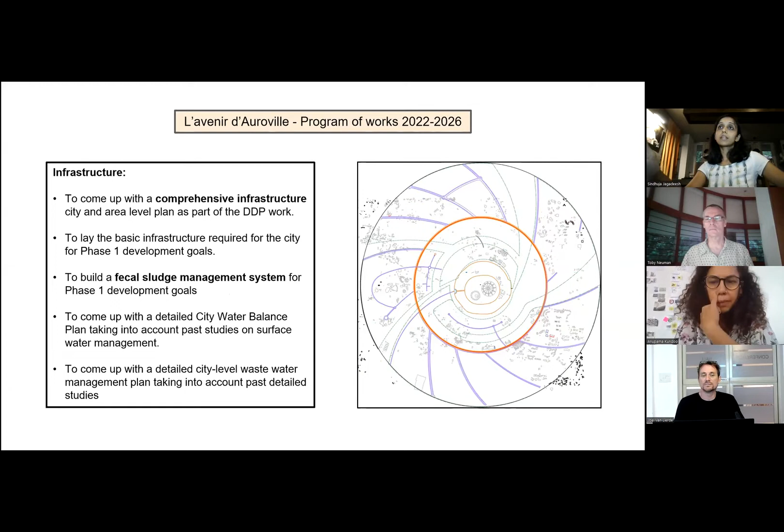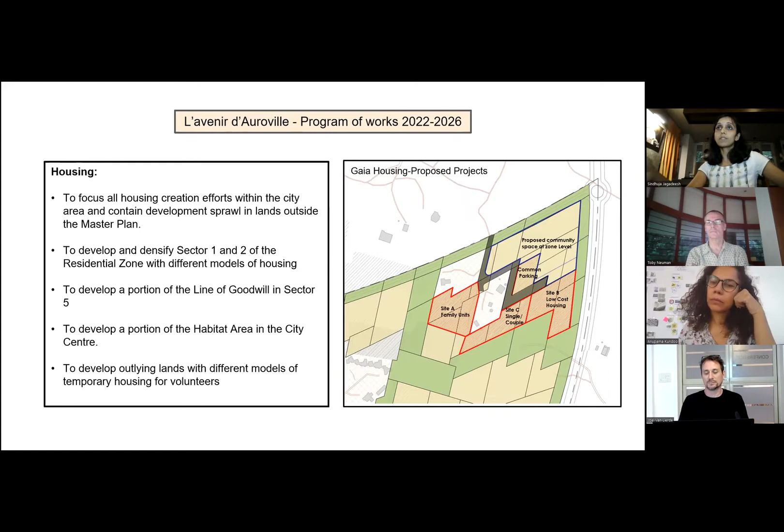Along with this, there is a whole infrastructure plan which is being drawn up right now. I think when I pass the mic to Govind, he can speak a bit more specifically on what are the infrastructure plans. And for housing, we would like to provide, at least in plan, in the next 3 to 5 years, housing for the 12,000 new people that are coming. Immediately for this year, we are starting to look at developing 1,000-bed permanent housing within Auroville, and another 1,000-bed sort of temporary housing for people who would like to come into Auroville and would like to explore and volunteer and stay maybe for some time, a few years or a few months.

Another very urgent thing to look into for us is the conservation of what is left of the green belt, because we know we have lost a lot of the green belt, not only to settlements, but also to wrong permissions given by the previous ATDCs for things like residential communities, hospitality projects, and so on in the green belt. And if you look at this map that is projected here, that's all the farms we have in the green belt, and some of them actually spill over into the city - all the purple lines that you see.

The green belt is supposed to be much bigger than what we have. We're looking at consolidating a lot of land within the green belt, at least what is available and reachable to us today, to work with FAMC and create a plan where larger areas can be consolidated for large-scale farming that can produce food for Auroville.

There's also a new FAMC in place by office order, put in place in June, and we're working together with them on this. We've been talking about this for years in Auroville.

At least I've heard this being talked about, that we have non-interconnected communities or settlements, gated community models with fences everywhere. Even though we have acquired the vast majority of land within Auroville city, we still have intra-community fences that have no connect, that doesn't allow connection between communities.

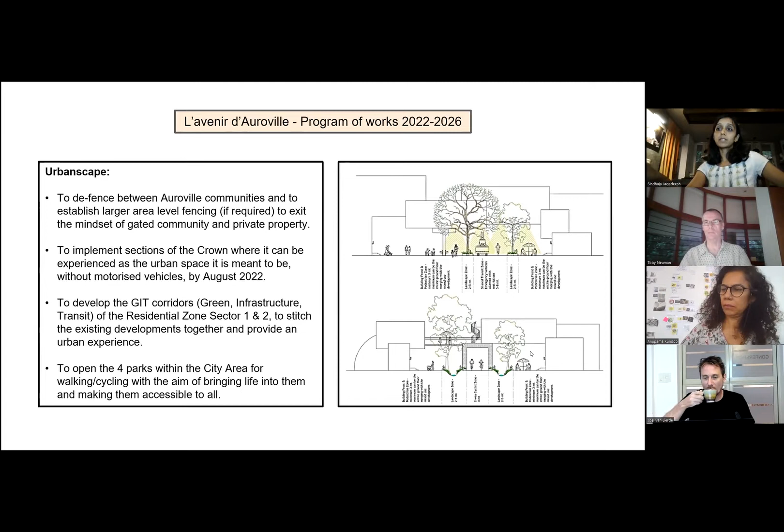We would also like to put our focus and energy into developing a detailed development plan for the industrial zone, at least to detail out pockets of it so permissions can be granted immediately. There are pending applications since 4 or 5 years which haven't even been replied to. So this work is very, very urgent, and we have taken it up.

I would like to take the opportunity to say that we are strengthening the team by hiring planners, urban designers, architects, interns. We have put together a whole budget and program for how to make all this happen, because we can't just talk about it anymore. We have to do it.

As we all know, the Crown project has started and it's happening on the ground, being executed by CPWD. We just issued a circular today to the community, informing them that the work has started, and we would appreciate cooperation. We plan to execute the whole 16.7 meter stretch in 5 different areas, or at least 3 different areas, to showcase what the Crown urban space could look like.

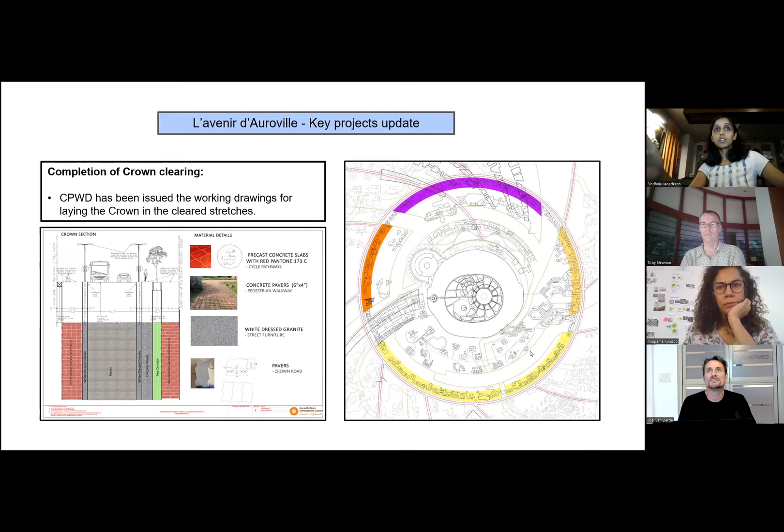More importantly, we would like to move by the end of this year to making the Crown a motorized vehicle free corridor, and I think that is what will bring the essence of the Crown. So the work has just started. Let us see how fast we can continue.

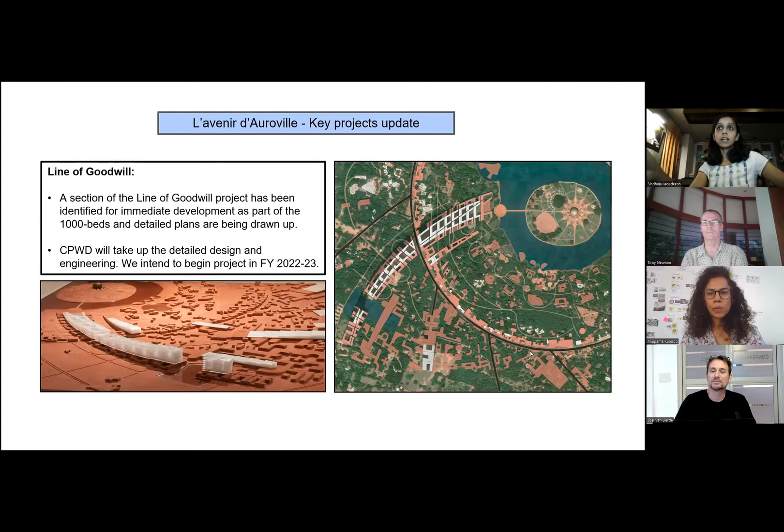Then there is the Line of Goodwill project, which has been in the pipeline for many years already and has been developed by a project team. Now it's a project cell directly under the ATDC. Anupama Kundoo herself has been working on this for several years, and Jaya is part of the project team, so I will let them elaborate when I pass it on.

When I talked about the economy, the development of the service node is not just for mobility transfer, it's also for economic development. This has all been detailed out over the last years. Only execution plans had not been done.

So now we have taken up this work of making execution plans, taking into account lands we own, lands in conflict and whatnot, and existing buildings, and actually creating a zoning that doesn't allow for sprawl development, because this is one of the problems in Auroville today. There is no FSI, there is no ground coverage defined, so everything has become a bit of a sprawl.

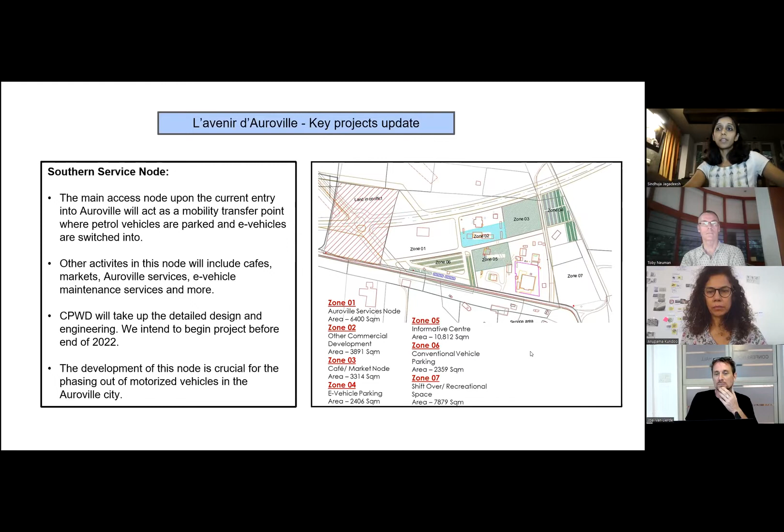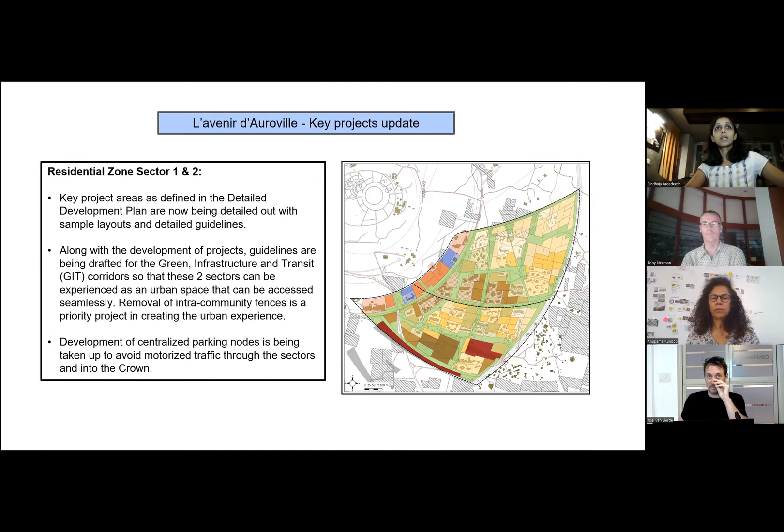So this is the area that we will be focusing on now, to open up public or publicly funded projects for housing for Auroville residents, along with Line of Goodwill. And these are some of the applications, public projects at least, which are in the pipeline we are looking at right now. They're in different stages of development.

And it is just to show you that this is the work that's being done, but there is a lot more. As we go through the files, the drives and the emails, we see that there is a lot to kind of dig up and revive and bring life to, because a lot of stalling has happened for projects and private initiatives. So unblocking, I think, is the motto of the new team, and I think we are very excited to do that. Thank you.

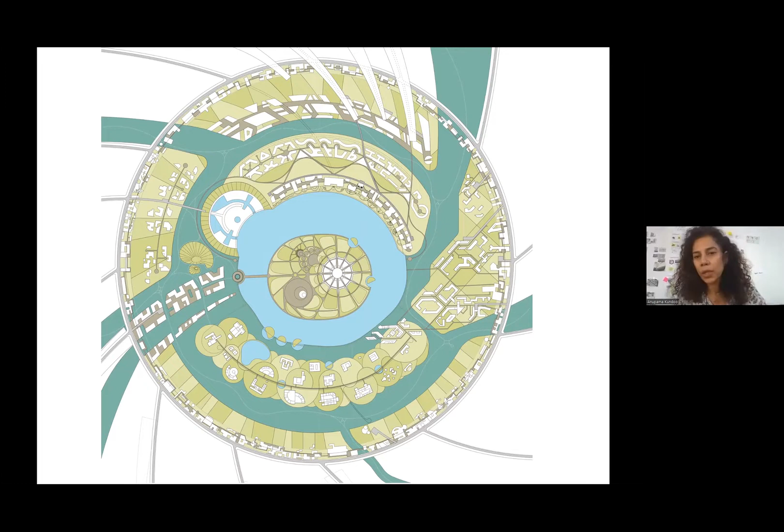Around 300 meters or so into the lake, up to the lake edge, is what we have to move through. So we will not have to rely only on bicycle paths beside the public transport—there will be many other networks, and I'll give you a glimpse of that. We're trying to consolidate this city center as a priority with all its developments, and as you know, the Crown Belt also connects the 4 zones of Auroville.

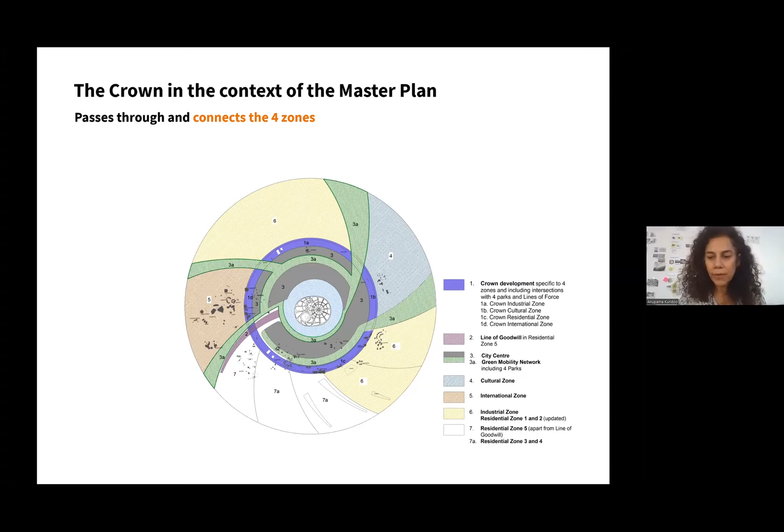So what the city center actually does is enclose, in a spiraling manner, parts of all of those zones. Each of the 4 zones are inside the city center. So we have the possibility to build swatches of all those zones and have a very cohesive city center if we develop all elements of it.

In the very first phase, if we only develop this much, we will achieve a population of 20,000, and that's what we're targeting as a first phase. Residential zones 1 and 2 will give us a further population of 5,000 people. The city center has not so much residential, but it does have 5,000 too. So together that is 10,000, and the Line of Goodwill, which you see jutting out from the left-hand side, will also give us 10,000 people.

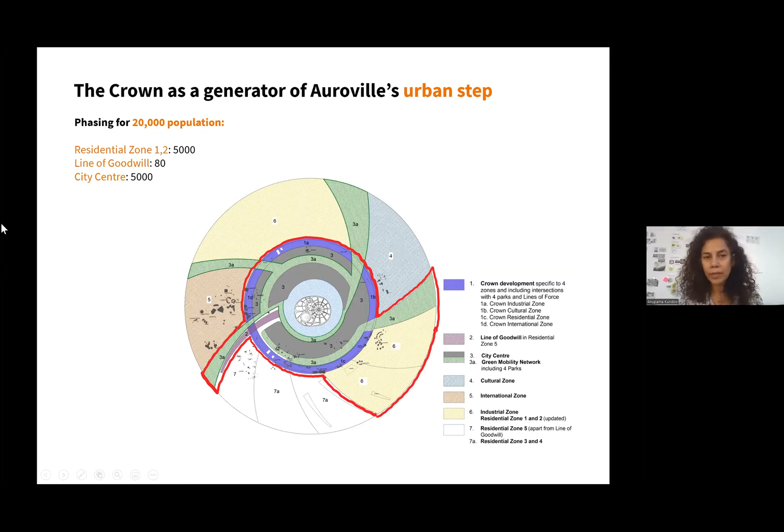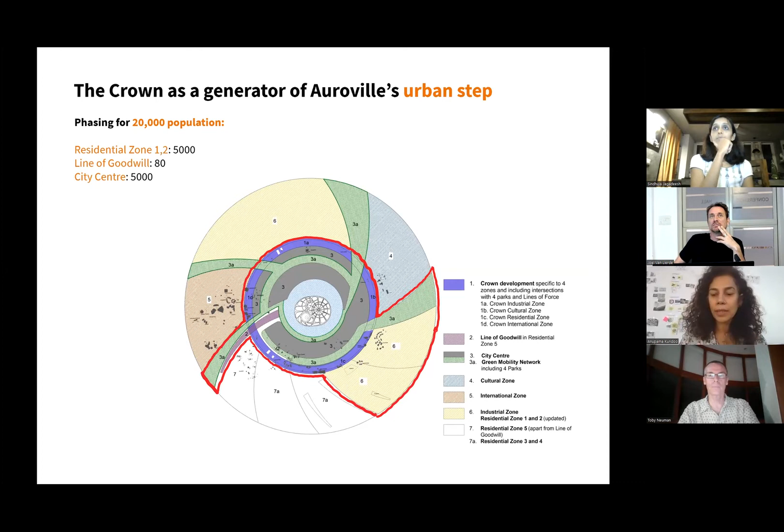There's a mistake on the slide which says 80 - it's altogether 20,000 people. But the new infrastructure we will lay is only the part of the Line of Goodwill, so only 700 meters long of infrastructure in a line will suddenly allow us a population of 20,000 without scattering.

One of the areas we have worked out is how the spirit of the crown, which is envisioned as a very pedestrian, lively space, not interrupted by vehicular traffic, can be realized. This has been one of the major areas of work in the last half a year, I would say.

The crown will allow us to go inward and outward - the facilities along the crown buildings will allow us to serve both sides of the crown equally. It has a very important role to enable the rest of the public transport, which will be in the radials and going outwards.

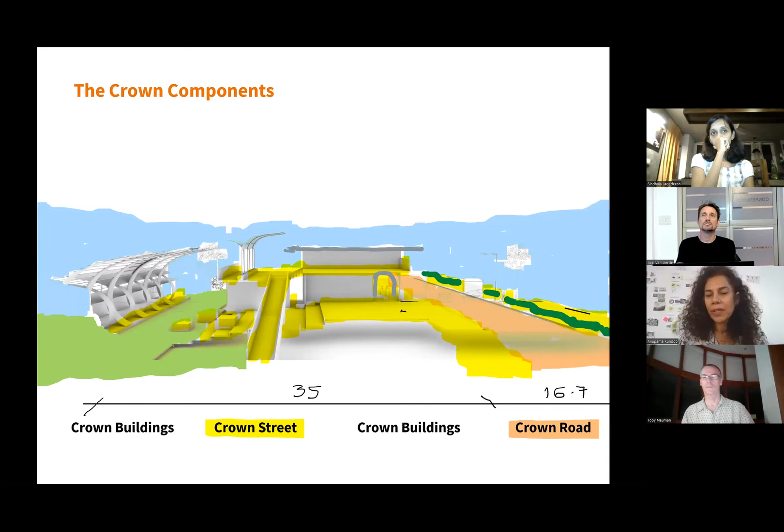So I'm going to skip this part. We have been defining the quality of urban spaces - the spaces between the buildings that actually make a city livable and prioritize public life. These are the type of parameters we have been defining.

Without going technical, I just want to give you an idea that in the crown, the public transport - we are making 4 separate networks. There's a red network. Auroville will have a plan of 4 totally independent movement areas, which we are calling the red network, the yellow network, the green network, and the blue network.

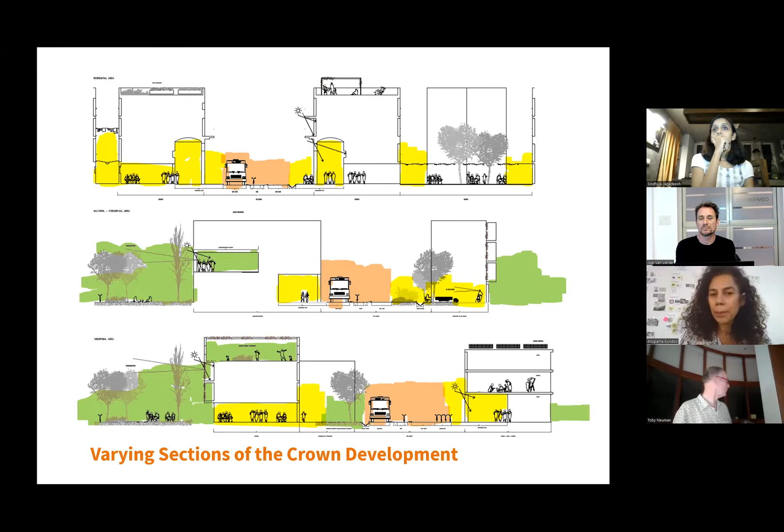These types of spaces will interact in some of the junctions in the crown. The section of the crown will vary, not only according to which zone it cuts, but also because it is conceived as a non-monotonous and fluid type of space, which has the intimacy of some of the old settlements we know in India already as pedestrian cities.

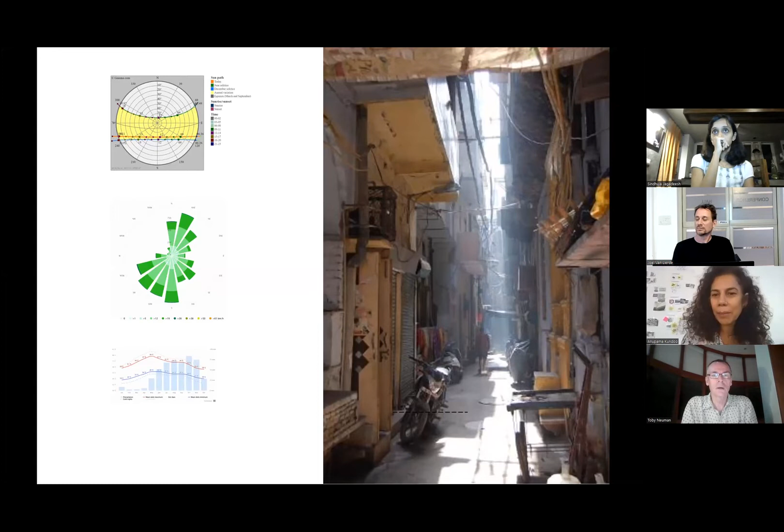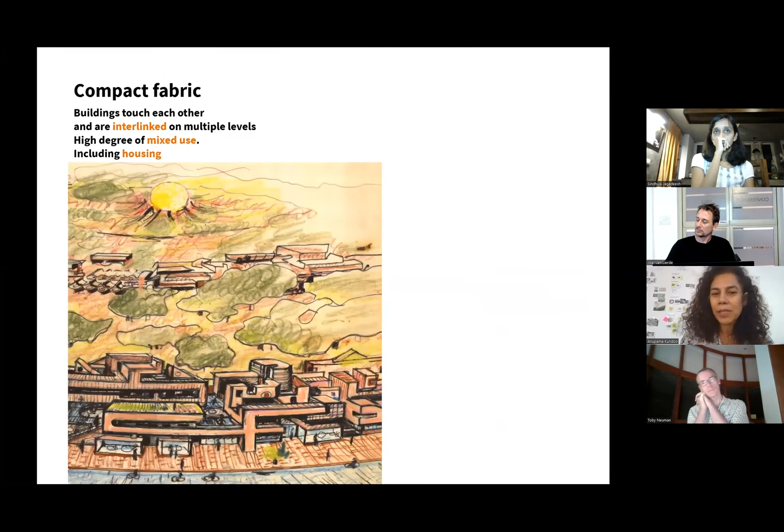But also we know it from a lot of pre-industrial examples across the world, where these became naturally shaded spaces that are comfortable for people to meet each other and not get interrupted by transportation cutting through. Auroville was always conceived like that, but we are working out the actual urban fabric, and we have studied all these other cities as examples, and of course Roger Anger's own work.

So please do not think that the Crown Road has to accommodate all of those wishes. Alongside the road, there are other paved areas which have this rich quality of public interaction, which are very much part of the Crown development.

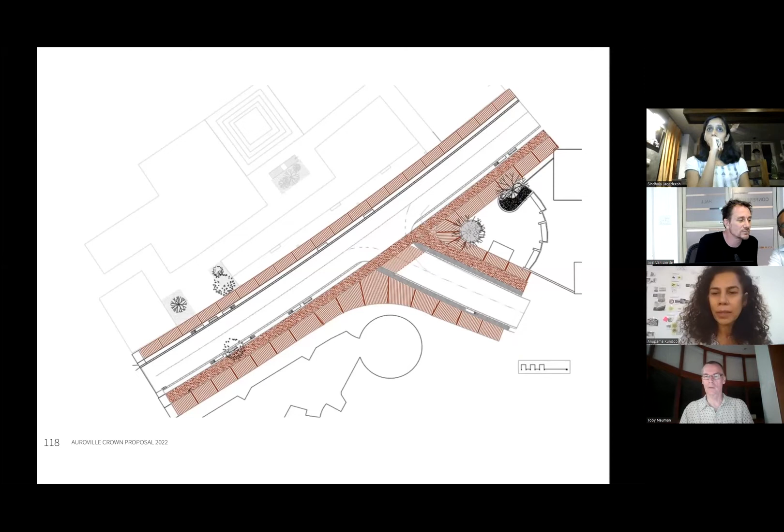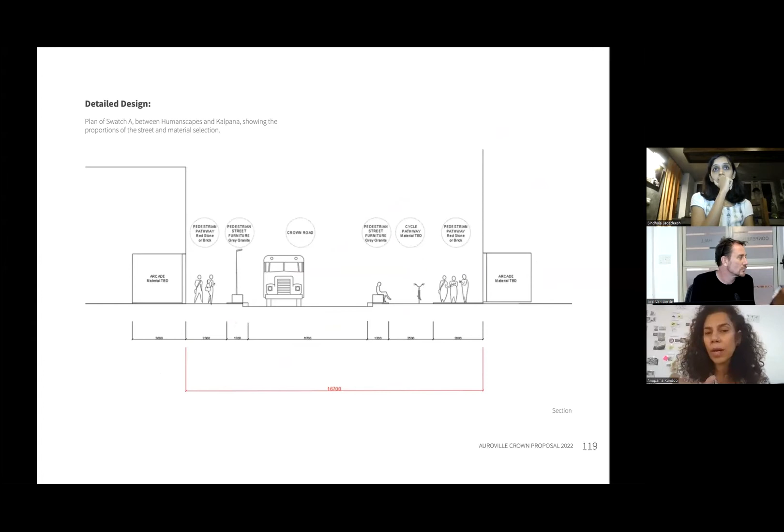One stretch has been detailed out, which we are going to test one-to-one - Sindhuja spoke about it. We have also got sections which show why, even though our other streets are going to be much more intimate, the Crown Road also needs to accommodate emergency vehicles, fire brigades, ambulances and so on, material delivery. So we have to also see it as an infrastructure corridor.

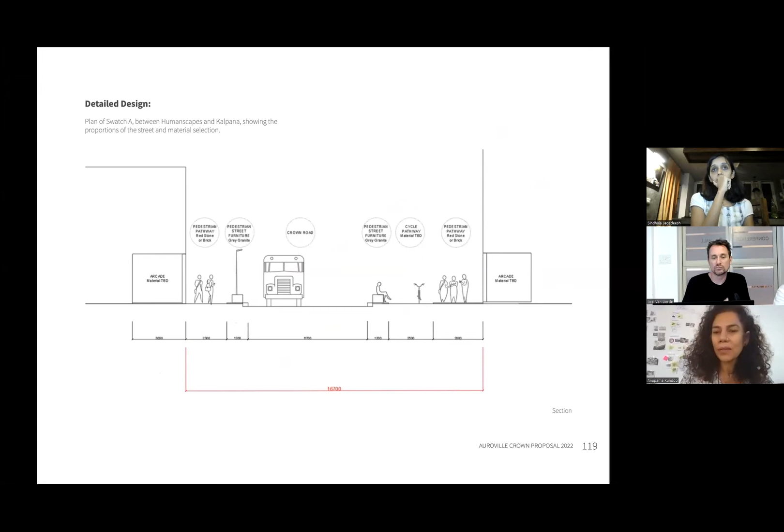So coming back to the city center, I want to explain the networks we are going to have. We have this red network where public transport will occur, and you can see that there is a semicircular thing at the bottom part.

That is the kindergarten and schools, and there's going to be a kind of a toy train, which was always kind of planned, so that the children are dropped off there and thereafter they go on their own.

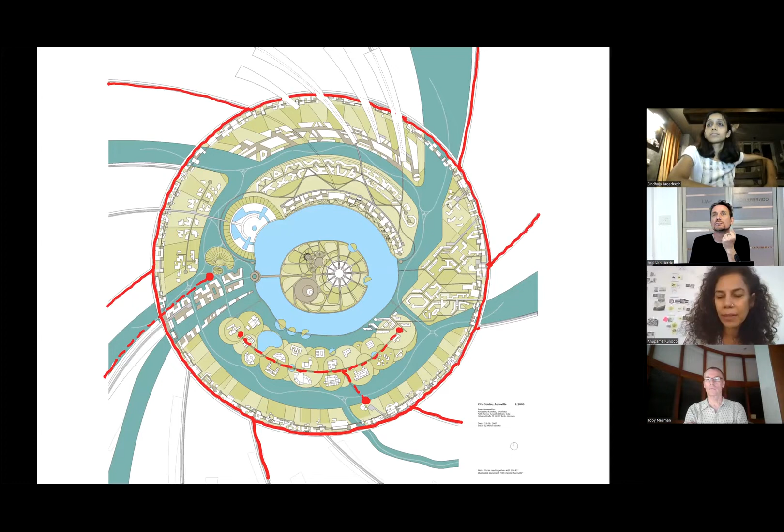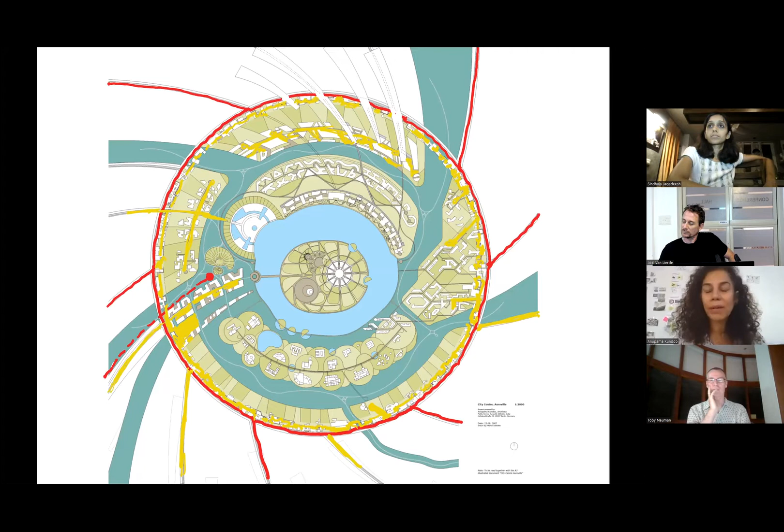There are very interesting shuttles planned here, some at the child scale and elsewhere at the pedestrian scale. The red network shows occasional service roads with timings. The yellow network is the hub of public spaces where all the facilities are, pedestrian spaces that are a little noisy, going through lively areas with the street quality many people in Auroville have been hoping for in the Crown, fearing it wouldn't happen. It indeed happens in the inner circle of the Crown.

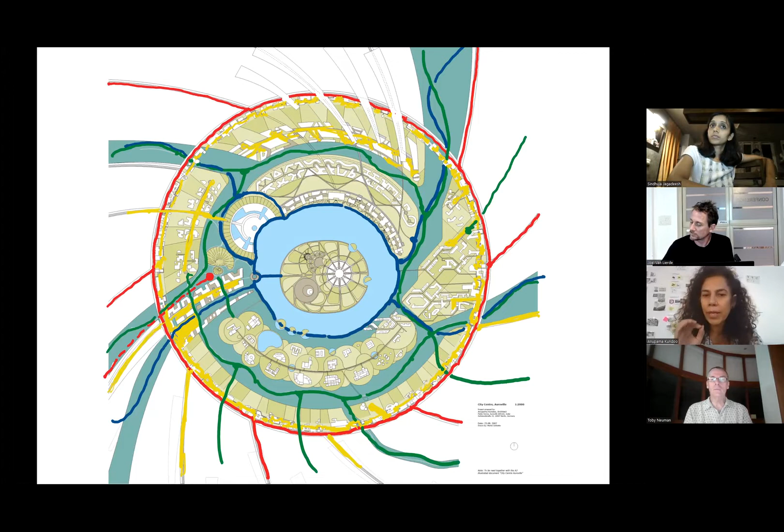Then there is a green network, for people who take bicycles, skateboards, or whatever and don't even need to see any vehicle. Every building can be accessed through this route as well. And the blue network is a very meditative, recreational route which ends in the lake promenade.

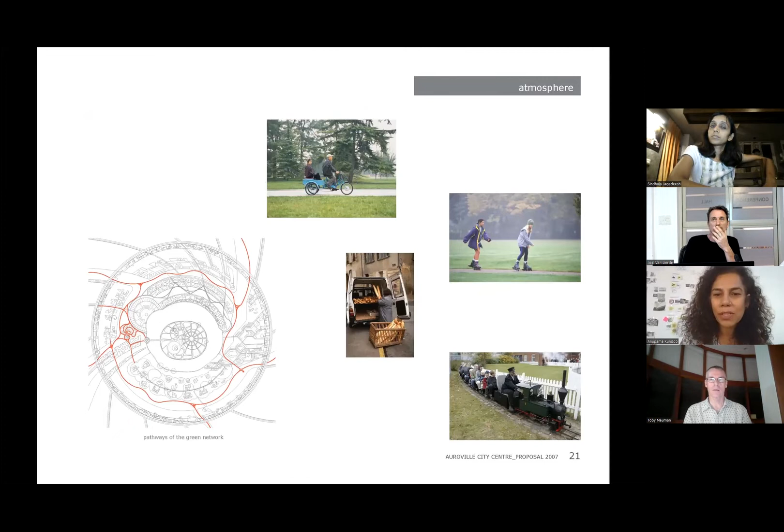This type of plan has been thoroughly worked out, and the quality of the various street sections has been defined since long ago. All of you who have used this building will understand that some of these principles have been tested through these covered walkways, so that even in monsoon, harsh rains, or sun, we can still feel like walking.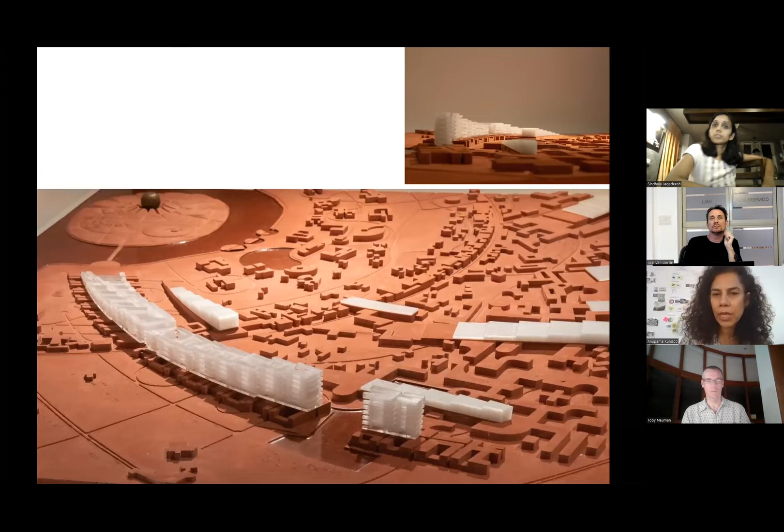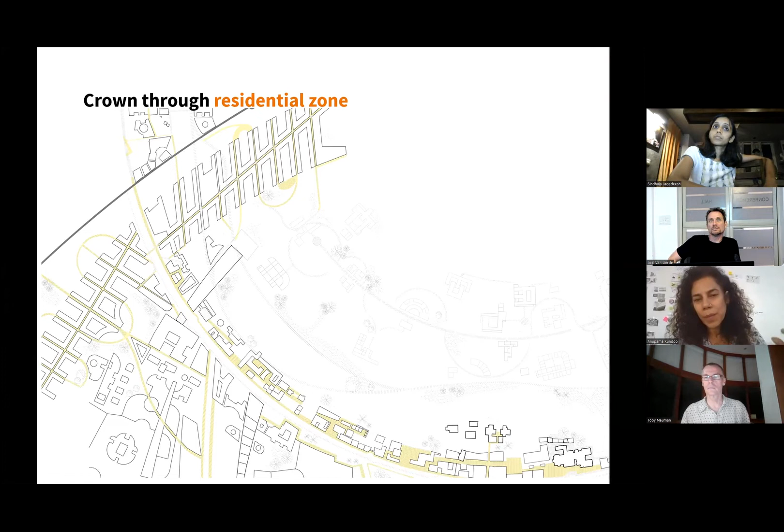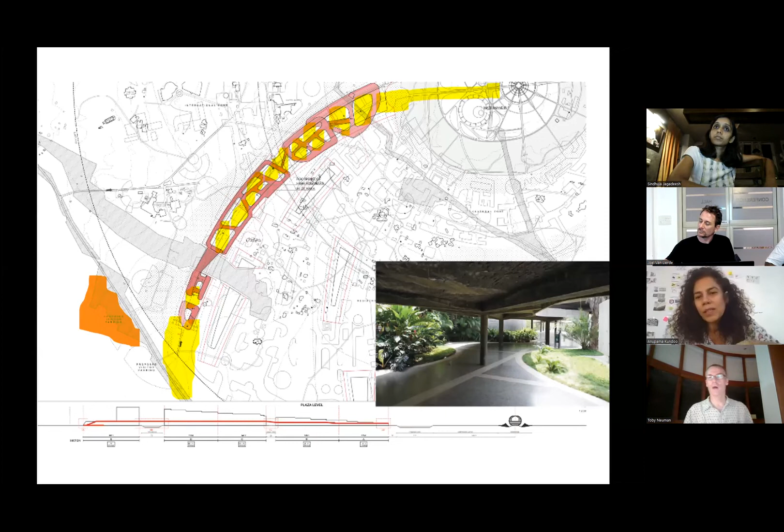I won't talk about the Line of Goodwill, which is an important project Jaya will describe, but I want to explain that the same red, yellow, green and blue networks will also go through such a tower building. These pedestrian spaces are fully integrated, bicycle paths are integrated, and visitors entering will walk through shaded spaces straight into the Matri Mandir, without disturbing daily life, with bicycle paths that cut through.

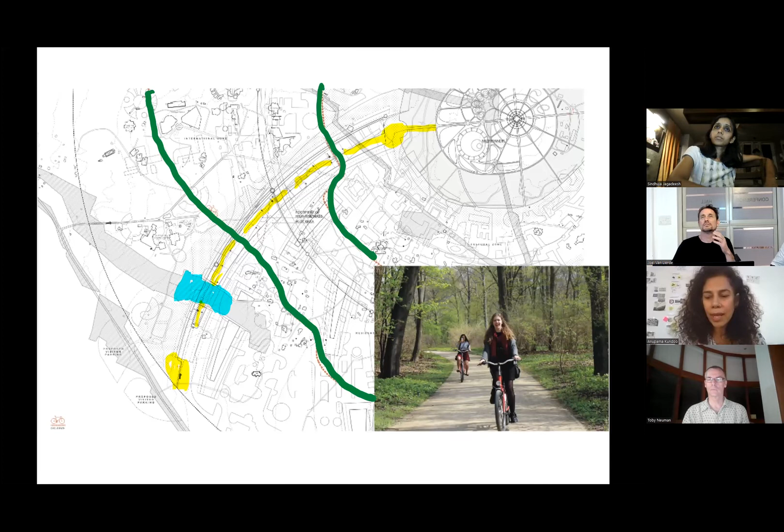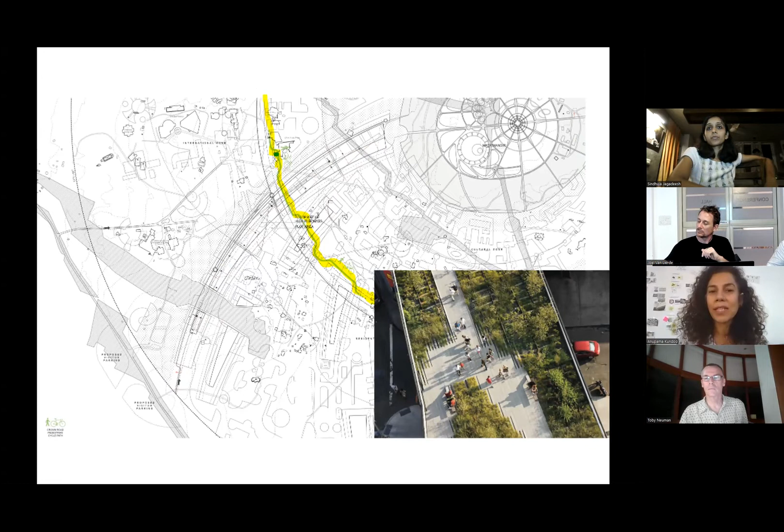The mobility is very holistic, and it's something I'd like to take a special session on to understand, so people are reassured that this Crown Road is not the only way to move in Auroville. There are intricate networks in each and every zone.

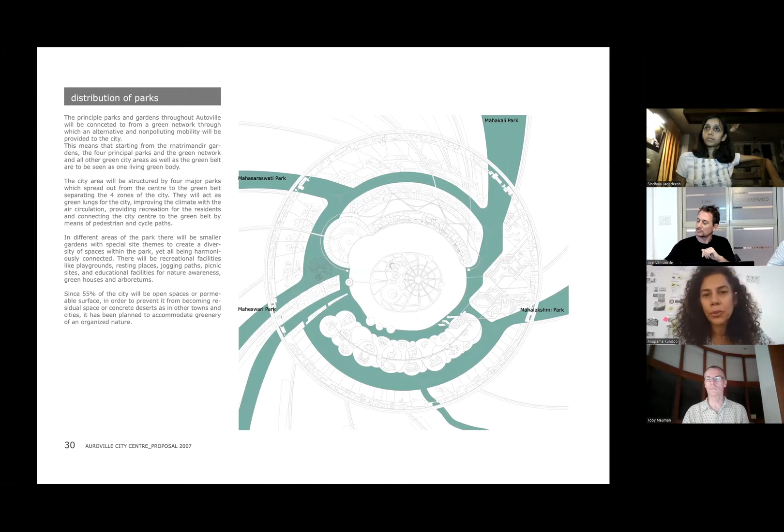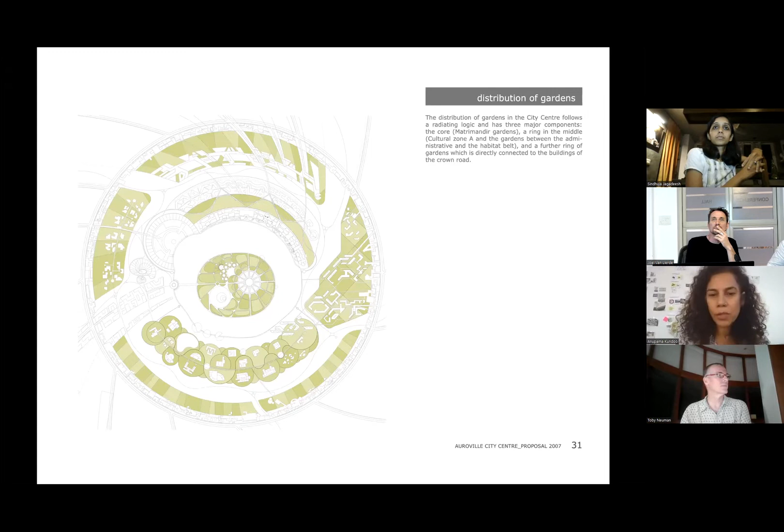It's also important to understand there's a concept of unified parks and separate gardens, smaller patches of designed urban recreational space that interface between the building and the common park. So between this and that, you have two forms of green networks.

Sindhuja already explained that 1,000 people, 1,000 beds, are going to be provided in the first phase. I have read a lot of different views and question marks about whether Auroville is going to follow the original promised square meter per person in the residential spaces.

I've heard some questions put forward suggesting the current planning team is not following the 30 square meter per person guideline. This is not true. It is also not purely 30 square meters, it's even less for a single. In the original plan by Roger Anger, there were cells and apartments planned as clusters of different types of sharing, and we are absolutely following that. The per person carpet area is 22 square meters for singles, but there are shared spaces, common kitchens, cluster level common spaces, and neighborhood level common spaces. So without going into details, yes, all of that is being followed.

Two locations are being proposed for the first batch of 1,000 houses. A lot of people are also talking on the internet about why housing is being planned in the administrative zone. It was always part of the original plan, so that office areas and work areas are not isolated. Alongside the administrative belt, a housing belt was always part of the plan.

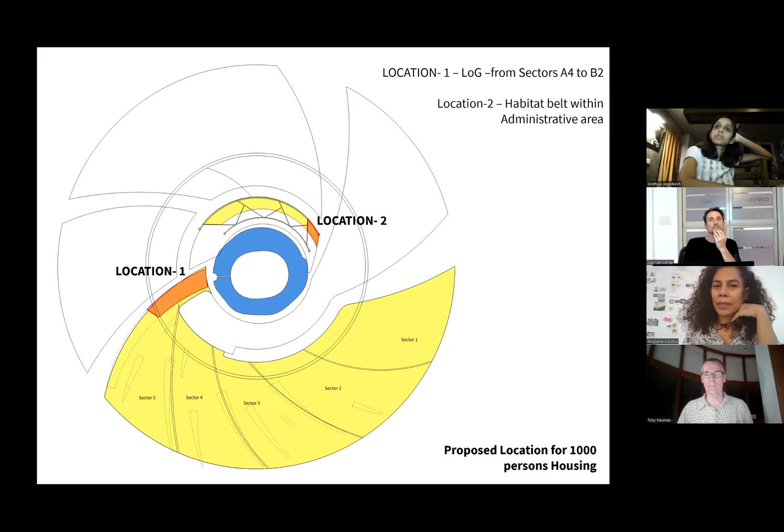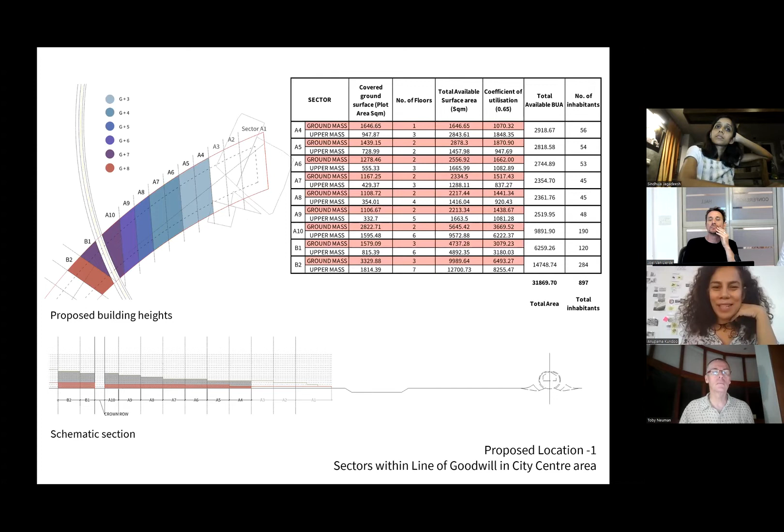And exactly in this plan, Sunship and other Citadine, etc., Mitra have been planned in a very planned manner, and you will see that was always planned before the housing began. So there are all of these calculations, which I don't want to bore you with, but they exist. That's one part of the work.

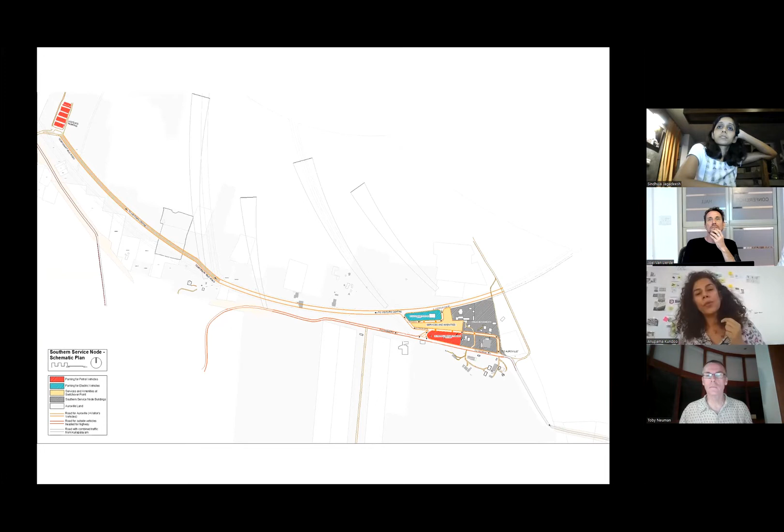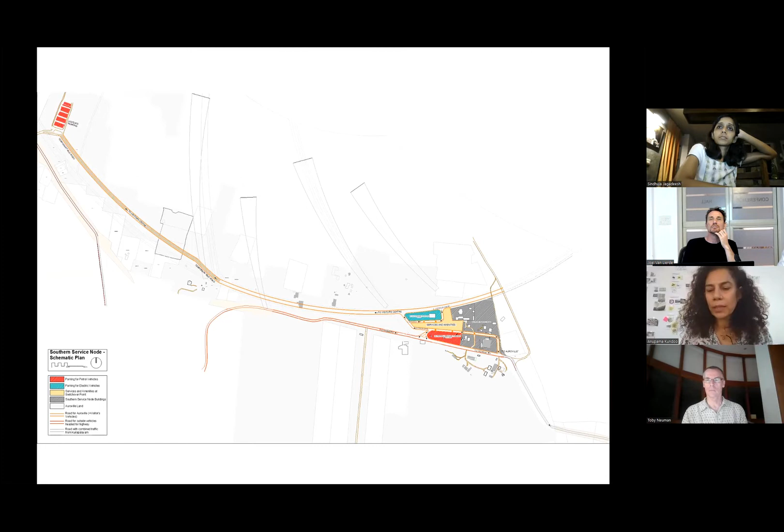The next part is how to interface the mobility from outside, when people enter Auroville—how the interfaces will happen, where conventional transport has to be left behind, and the new, non-polluting Auroville transport has to be plugged in. We have been working on this too; Sindhuja showed one part, but we are detailing out the service nodes, and also looking after the villages who are currently getting disturbed by our mobility. We are working on that as well.

And finally, I want to show you this project in the administrative belt. When we had done an urban design, with Roger Anger guiding us, we had started the town hall complex as you now know it. But on the Perumbuk land next to it, the main town hall was planned, and this current town hall was planned for being the urban planning structure, just like the archive. There are buildings planned for the different aspects of administration.

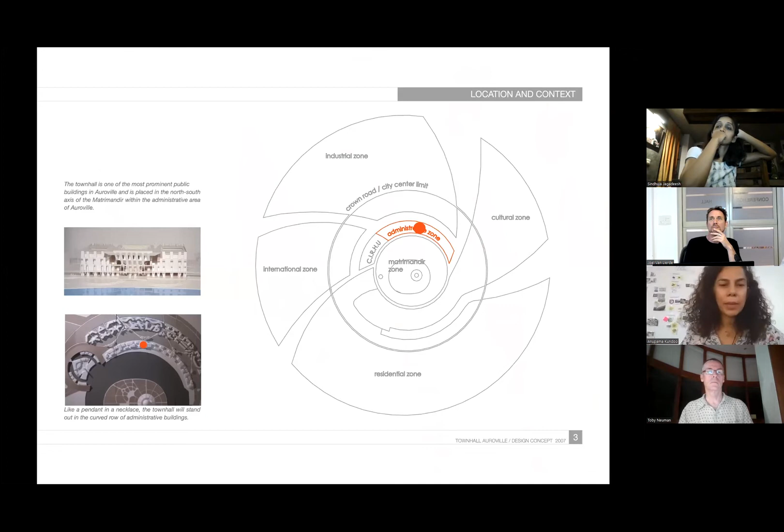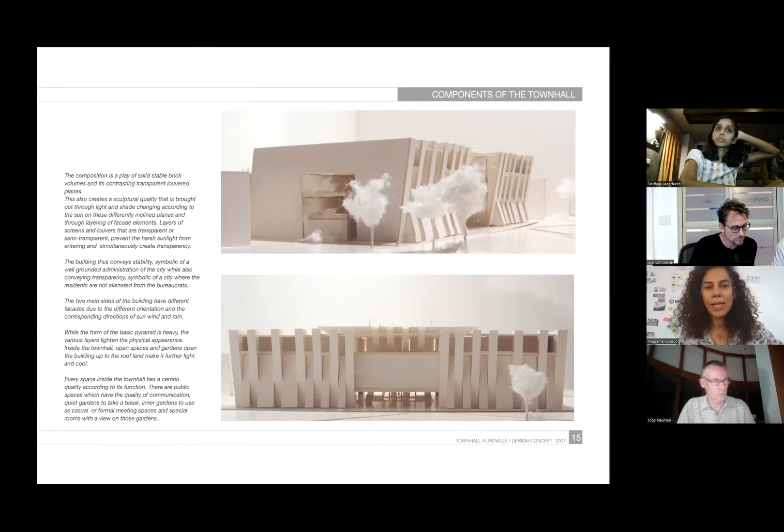Already in 2007, a detailed project had been made for the final town hall, which I'm just going to give you a glimpse of. We would like to realize this project, because I have seen on the internet some people saying we should have a place for residents' assembly meetings, etc. The main town hall already has planned for all of those things, okay, and this exists, and this is a project we want to also build.

So in this case, what we have is a sketch which Roger had done, which I have developed into a detailed project which he had approved. It's a reverse pyramid, and on the top are the residents, and then on the roof they can meet, and then comes the formal meeting spaces, and it tapers down.

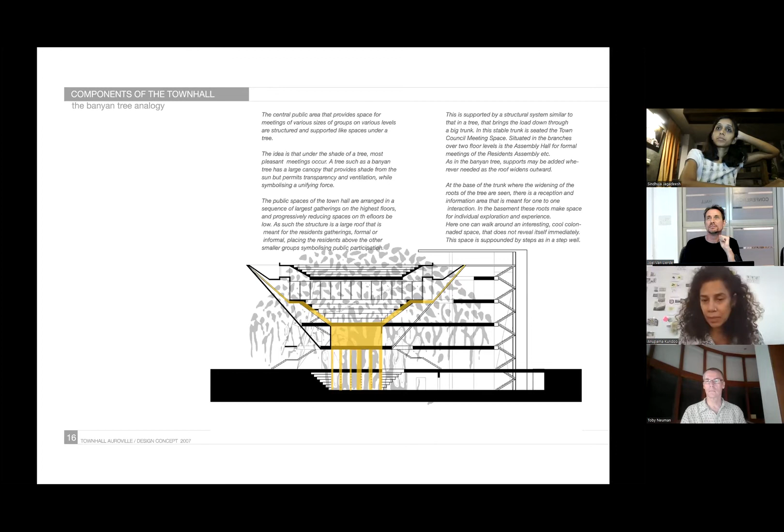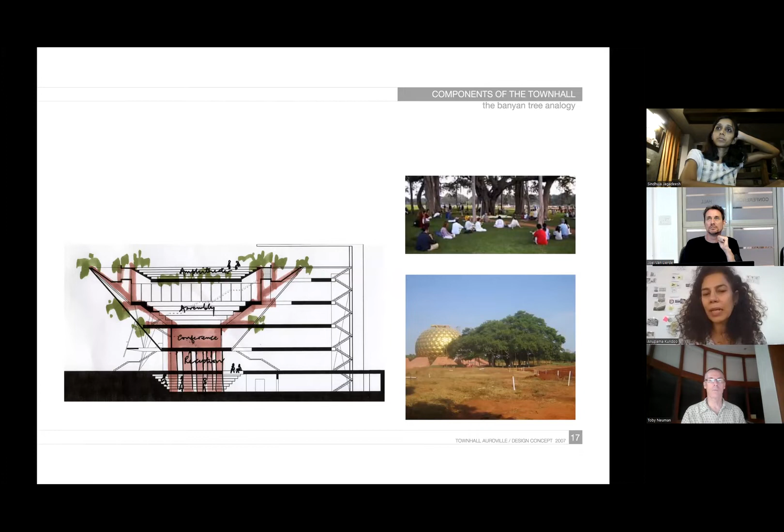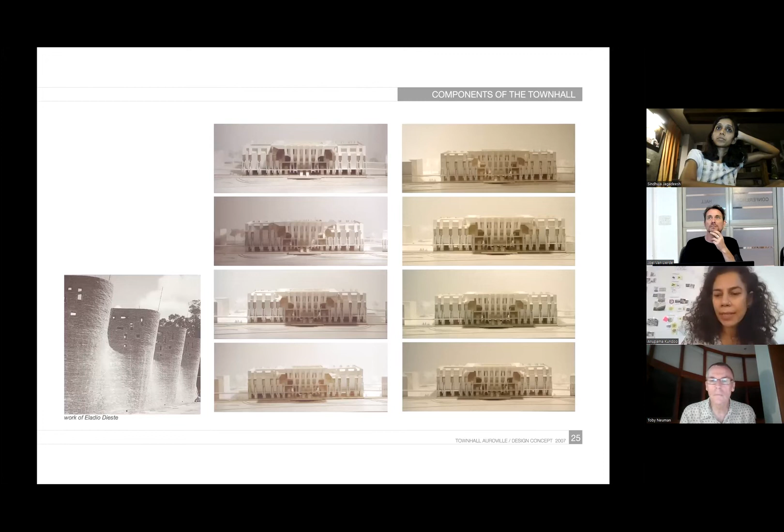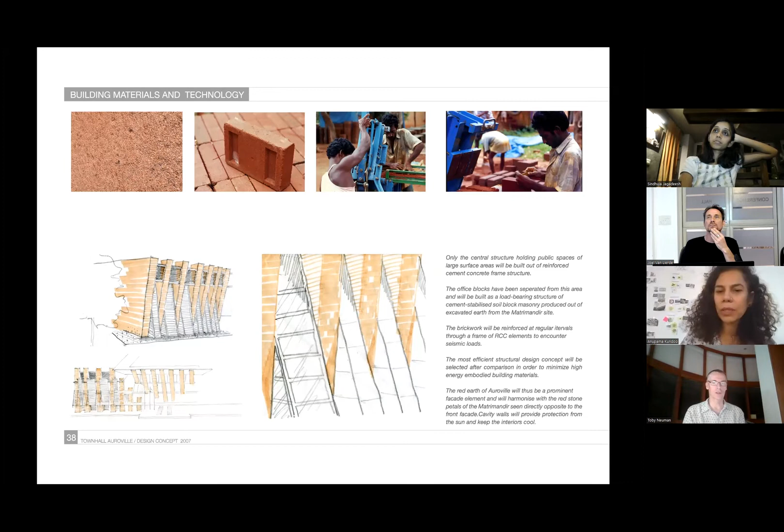And we had also imagined that this will be designed with solar passive principles, and with some of the materials that are sourced from the lake earth, could hopefully be used. Maybe we should start making building materials to build the rest of the city with some of the earth. These type of ideas had been explored.

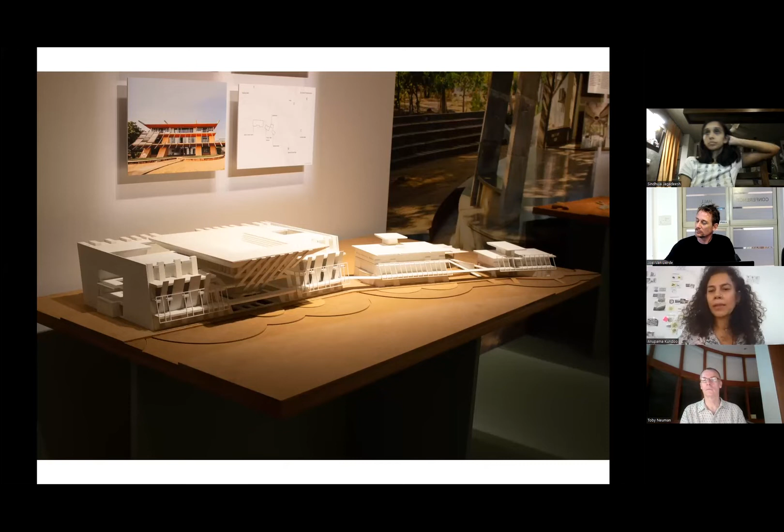Here is the model of the current complex of the town hall alongside the main town hall, so you can get the sense of the importance of the town hall. On the sides of that pyramid are many more office spaces for many of the uses. People like the working committee office, etc., will have to all move there, land service, etc. And the adjoining one will be the planning office only.

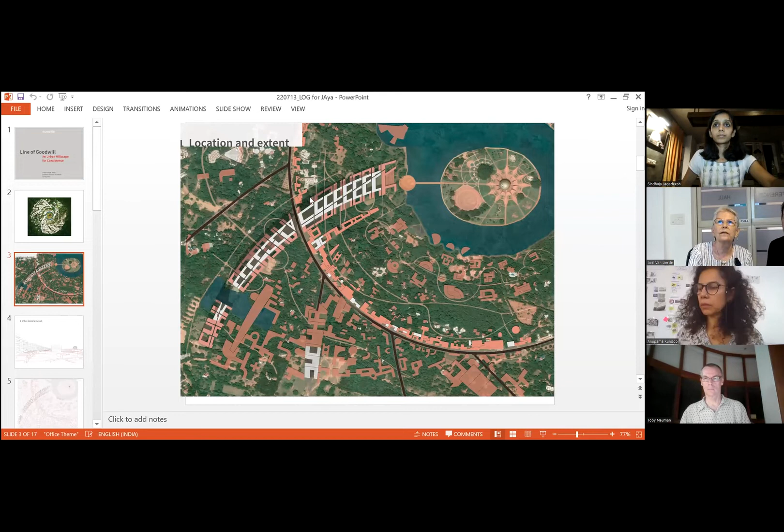So here, yes. The whole part, what you see here, now you have to make it a little bit smaller. No. Why isn't it? No, we have lost it. Just keep them the size.

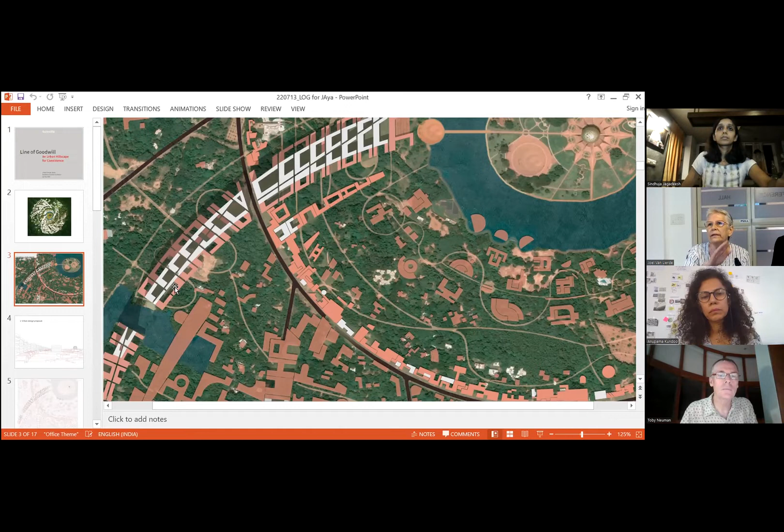So basically, it stretches from here all the way down to here, and that is the habitat. There will be about 8,000 people living here. This is very inspiring because what we are looking at is how to create density in a way that is a high rise, a hillscape actually. So what you see on the outside, which is red here on these sides, goes from ground level up to 4 stories, and that can be done in red earth, etc. Then you have the high rise in the middle, the white, and that goes up to 18 stories at the end down here in the gateway.

For me, I have lived in Auroville. When I travel to Chennai, we have seen over the last 10, 15 years how the high rises are coming up. 18 stories is not very high in this context, though it sounds much to us. The high rises are built in small clusters, fenced in. I think we can assume that the children who live in these high rises go to private schools. In India, the government schools have big grounds; private schools, unless they are very expensive ones, will not have that. So these children move between environments which are indoors and confined, without much access to nature.

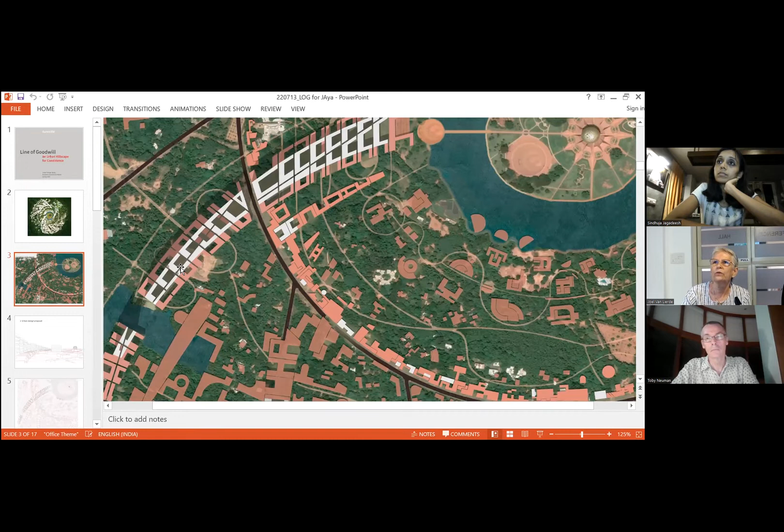When we build density, it means that we can leave space for nature. Practically all countries in the world have to build density because we need to let nature actually have the space. Human beings are the most adaptable species, and we are also the most invasive species. We talk about small fishes and these things, but we are the most invasive species. When you read in the newspapers here, it's about elephants being killed, etc. We are invading the wild spaces big time. We need to spread out, and we keep spreading out and taking. Unless we build a density that is actually good for us, this is not going to work. We are really destroying the earth, the environment, the other beings, and we keep doing it.

We don't stop just because we see that it's happening. We talk about the environment, we talk about the animals, we do animal organizations, but we actually don't change our lifestyle. And it is our lifestyle that is creating these difficulties.

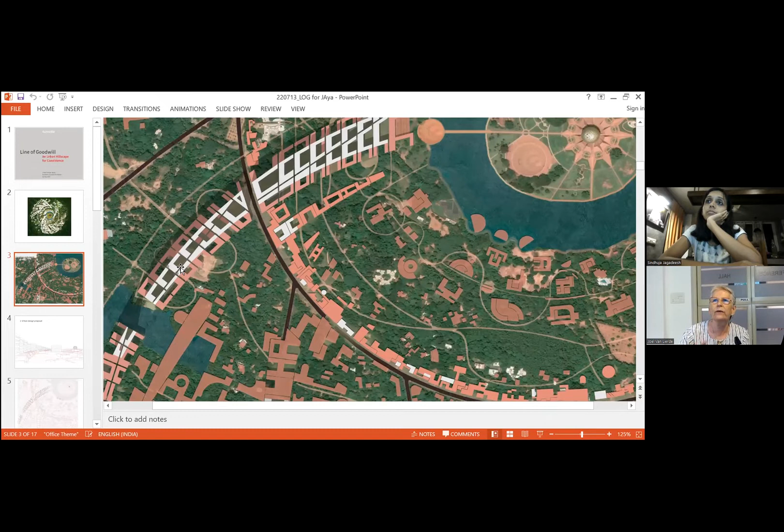As human beings, we have the capacity to actually shift. An animal is totally dependent on the size of its environment. It has, what do you call it in English? I forget it, in Swedish you say revir. Each animal, or most animals, have a certain area that they need, a certain amount of space, and it can be very big for big animals like elephants. Human beings don't have that situation. We actually can live in very small spaces. We can live much more confined, and we can make it beautiful and nice, and we can thrive, because we can always adapt our environment and ourselves.

So in the line of goodwill, this is a very important factor. Can we create this kind of density? Can we create it in such a way that everybody has a private space? There are semi-private spaces, public spaces, collective spaces. Can we create villages within a high-rise? Can something like that be attempted? Now a high-rise goes up, you have the doors, and you don't practically know the people in the house you live in. There can be 400 people in the house, and maybe you know 2 or 3 families. I think this is a very common experience.

Can we create villages? Can we create an environment that is actually walkable, cyclable, interactive between people, where collective facilities are used, where the water is moving in such a way that we are recycling it? So I lose the words a bit, but it is on the energy levels, on all the levels. Can we have the highest cutting edge that exists? When we looked at this, when we started this project 6 years ago, we were saying we wanted to be cutting edge at all levels: the greenery, the energy, the water use, the function, and space for people.

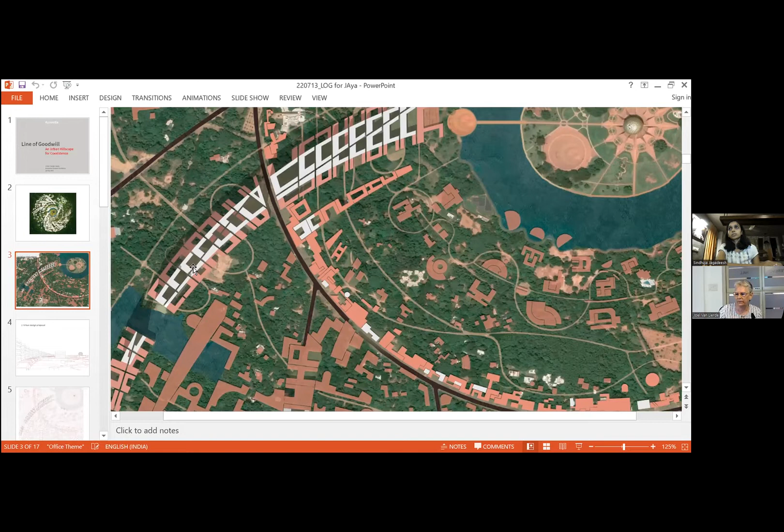When we build it, can we use the materials? Can we treat the labor well? Can we try to do something which actually has integrity and integrality the whole way? This is our aim, which is the Line of Goodwill.

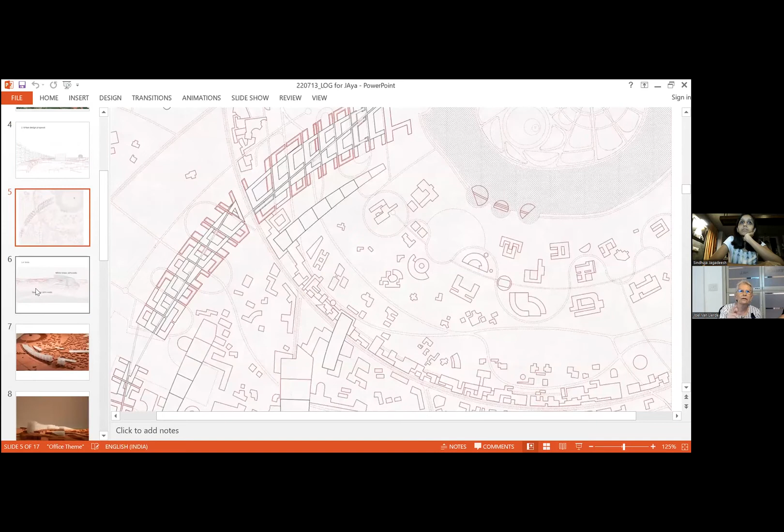35% is void, is open space. On the red, with the earth, there you have 50% which is open space. I don't have the numbers in my head, but the collective spaces, etc., it is very, very different than how it is built normally. So there will be kindergartens, there will be gyms, there will be laundry places, there will be restaurants. All this will be happening. This will be like a city in the city.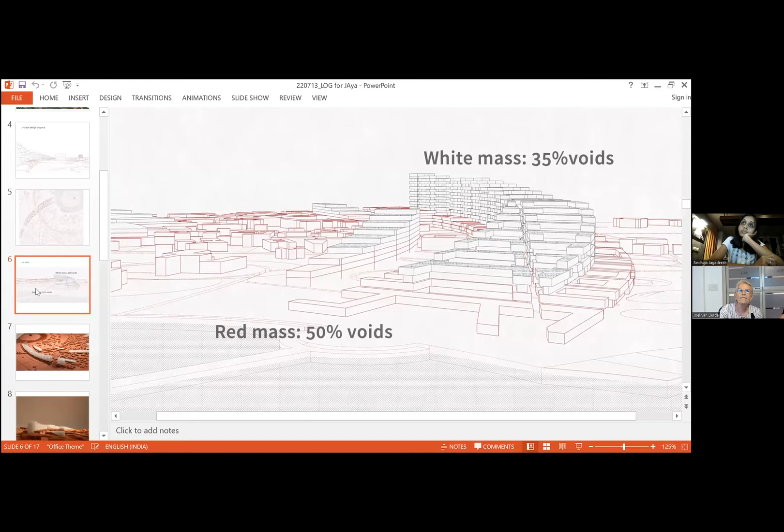I think we can go down. Yes, so you see here that this is the habitat. At the end, you have the Matrimandir access. Through the building, you can move through the building on many levels. I think somewhere on either the first or second floor, you will have electrical transport which goes through for the people who come for the Matrimandir access.

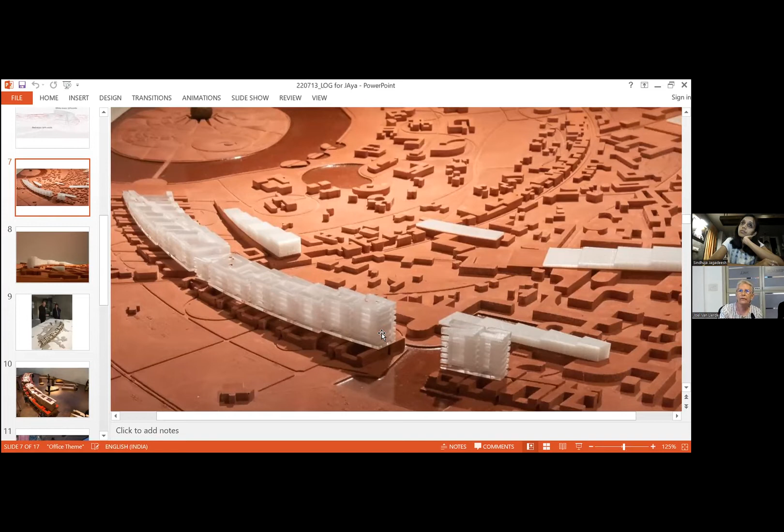There will also be 2 or 3 viewing points on the building, so that visitors can access, because the viewing point we have now will be gone. And this movement by the visitors will be in such a way that it doesn't disturb the living inside the building. This is a way of moving here.

Here you have the Oro dams. This is Perambok land and it's water catchment, so we cannot build on that, and we will not. So we have actually the last part, which we call the gateway. It's a separate building here, and that has a wide area around it with plaza, etc. And this is our, so we call it visitor center. This is where visitors come when they come to Auroville. We call it the gateway.

We had, pre-COVID, around 1 million day visitors per year. The present visitor center is very small, very much focused on sales and boutiques. This is not a mall. Some people, many people actually in Auroville, ask why are you building a mall? This is terrible, this is not a mall at all. I don't think anybody who works on this project is a mall fan, no.

What you have here is that you really have access in this building to everything that happens in Auroville. When you come here, it's interactive, there is culture, there is the waste handling, there is all this. You can come with your school class, you can access, you can look, you can go on exhibitions. This is a very interactive place where you can spend days exploring, where you can meet people, where you have the food, the restaurants. There will also be some hotel facilities, which will be for the people who come to go to Matrimandir and need to stay overnight.

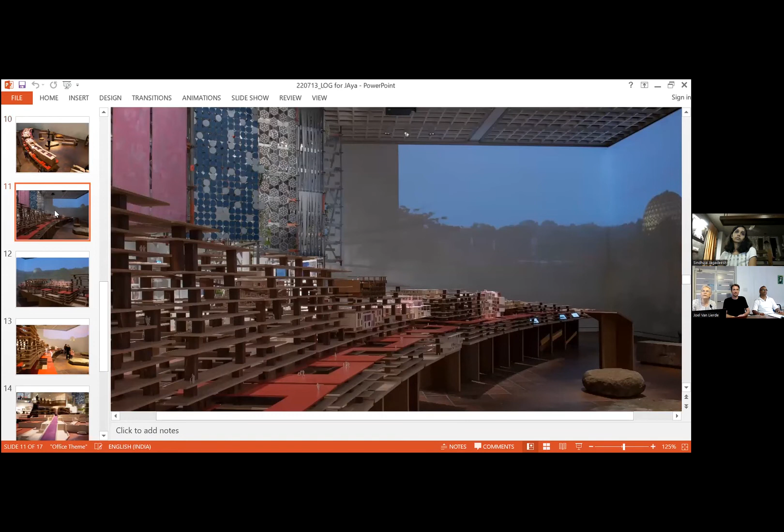Yes, I wanted to say a few words - actually we are all busy with what is happening here, but actually the world is very interested in what we are envisioning. I don't know who of you knows about Louisiana, it's a very iconic museum in Copenhagen, just close to Helsingør. In the first year of the COVID lockdown, there was a half-year-long exhibition by Anupama, very much focused on the line of goodwill. I can show you here a few pictures from it. This is a very, very big scale model, which was done there in the exhibition hall. I don't know how many people, but I think many people will have seen it in spite of the COVID lockdown.

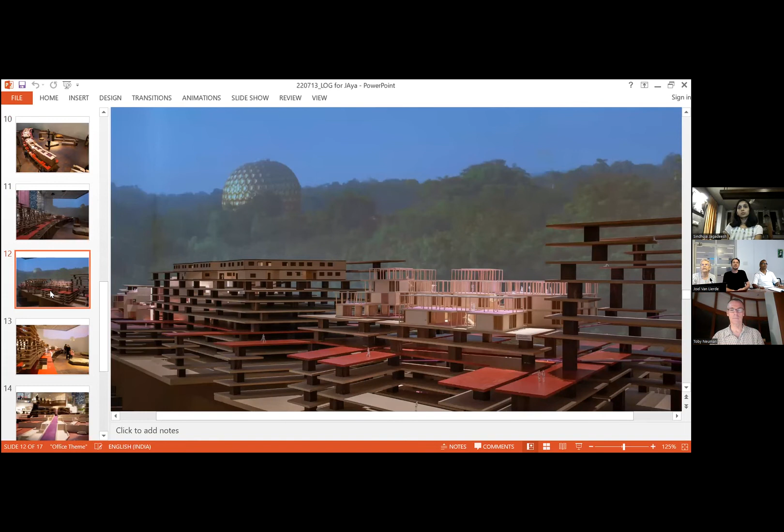In the background, there's a video filmed throughout the day, from early morning light till evening, of the Matrimandir, with bird song and everything. That was the background to this exhibition in the room.

You can see here, I think, the front plaza of the line of goodwill. And here you can see a bit from the stepping up on the sides, from the ground floor up to the 4th floor. This is trying to give a feel of the greenery of the building. I just wanted to share this with you.

This was a very amazing exhibition, which went on for a long time in a very iconic European museum, and was specially invited on this topic, Anupama. So there is a big interest.

This whole approach with the hillscape, which Roger Anger was working with 30 or 40 years ago, is today being taken up and investigated by big architect firms in Copenhagen and other places. We are at the forefront of this. How do you create a landscape with this hillscape? In a flat landscape like Auroville, how do you build this movement?

I also wanted to say another thing about the line of goodwill, another aspect. When the land was being sold to Auroville in the early days, when Mother was there, she gave the promise that the people would be given work. They sold the land, they had been farmers, and they would be given work.